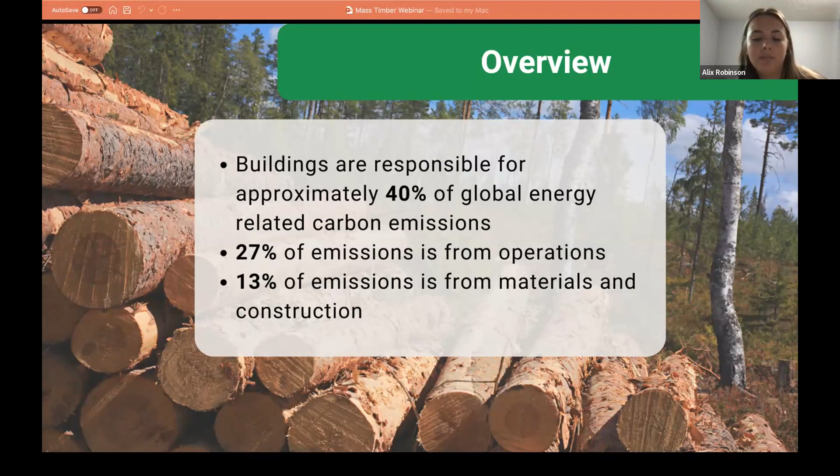To achieve Canada's climate targets, it's important to address the emissions from embodied carbon now. By doing so, we can pave the way for a lower emission building stock in the future. As a result, there is a demand for more sustainable construction materials, methods, design, and production systems. Mass timber is stimulating the construction market in Canada as it's being recognized as a sustainable alternative to traditional practices. This is why we're excited to bring this webinar to our network, to connect businesses and community members with valuable resources and experts.

I would now like to introduce our speaker, Steven Street, who will talk about the benefits of mass timber, some of the challenges in the industry, and provide insight on how you can initiate your own mass timber project. Steven is a longtime industry advocate who has spent more than 20 years developing domestic markets for wood products by creating new opportunities, driving change, and expanding the acceptance of wood structural systems in Canada.

Throughout his career, he has been around the best and brightest minds in engineering, architecture, and fabrication, an advantage that has allowed him to explore his passion for good design. Steven is active on ResCon's technical council and is assisting in fast-tracking the workforce and skills needed to build a low-carbon Ontario. I will now pass it over to you, Steven.

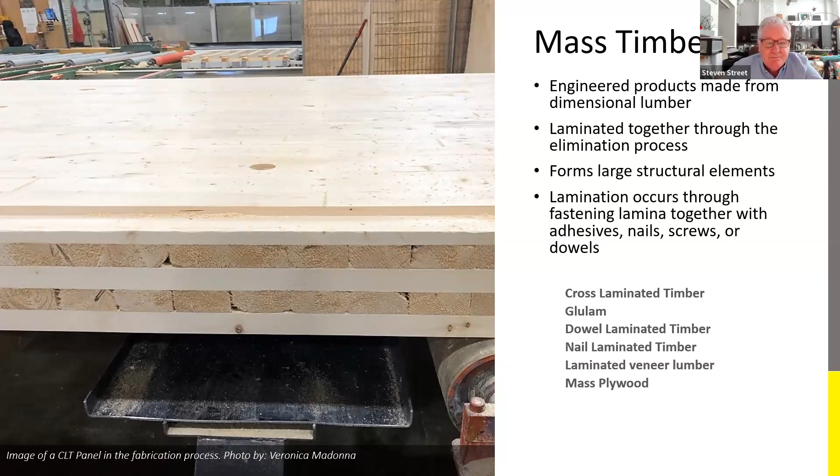This slide illustrates six product types: cross-laminated timber, glue laminated timber, nail laminated timber or warehouse deck, dowel laminated timber, mass plywood panels, and LVL or laminated veneer lumber panels.

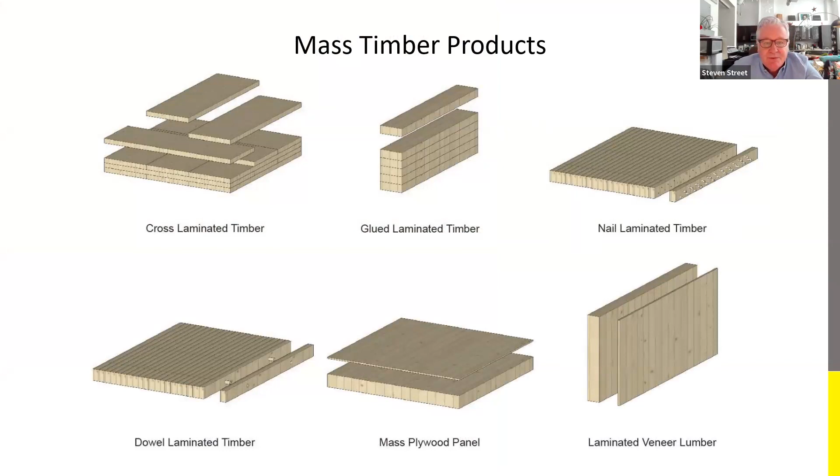Most of you are probably familiar with glue lam. Glue laminated timber is dimensional lumber stacked parallel to each other, creating long spans and high strength with this particular approach. The dimensional lumber is stacked, glued together, and typically columns, beams, and floor panels can be made from this.

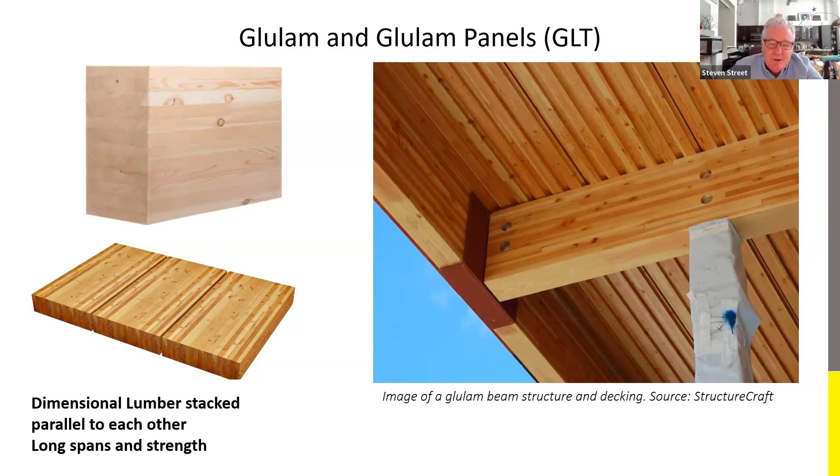Cross-laminated timber really came out of a collaboration between the academic world and industry in Europe probably 25 years ago or so, and we've steadily seen the European CLT market completely take off. They've been a bit ahead of us with their knowledge about the carbon impact of buildings and building types. Cross-laminated timber is really a very viable solution for shortening the carbon footprint of buildings.

This technology was introduced into North America around 2010, when the Austria House was fabricated at the Vancouver Olympics—the first project actually built in North America. Since then, we've seen a steady progression of buildings happen. It's the old chicken-and-egg thing, and now we start to have a large supply of materials spread across the country, so fabricators and interest in using this type of construction method is now building up.

Cross-laminated timber—this is dimensional lumber pressed together using adhesives, crossed over so each lamina is turned 90 degrees to the one below it, to find high strength, dimensionally stable products. This is probably as close to a reinforced concrete slab as you get, with the two-way action that the timber elements create.

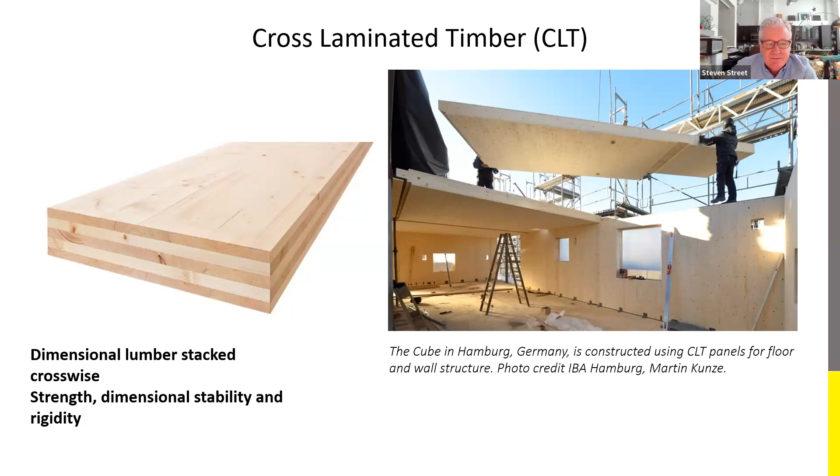Nailed laminated timber—we've used this for probably a couple hundred years. A lot of the post and beam buildings in the downtown cores of many of our urban centers across the country have actually used nailed laminated timber, or warehouse deck. This is dimensional lumber, basically 1.5 inches on center, nailed together using nails.

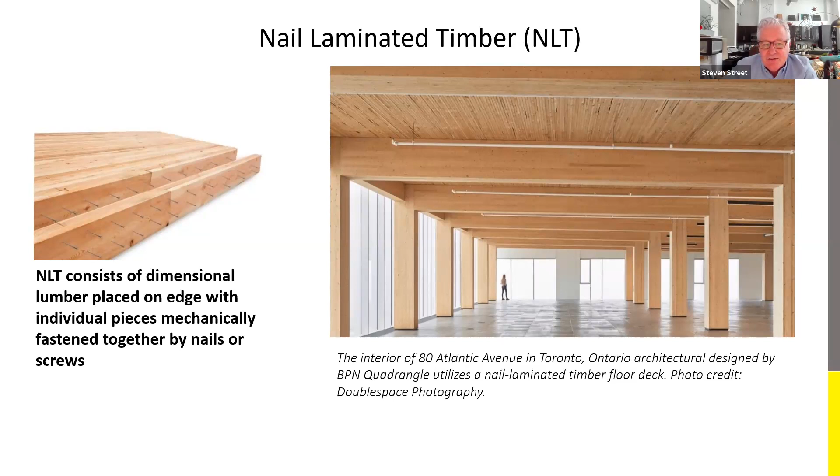There's an illustration here on the slide of 80 Atlantic in Toronto, in Liberty Village, that was actually fabricated a few years ago, just to give you an indication of how it can be used with glue lam columns and beams.

Dowel laminated timber is very much like nailed laminated timber, except the fastening is done with wooden hardwood dowels rather than nails. The lamina is set up 1.5 inches on center, and a hardwood dowel, which has a different moisture content than softwoods, is put through holes drilled in the members. The dry hardwood dowel will take on the moisture inside the softwoods and swell, so you end up with a very high strength friction fit.

So why are we talking today about mass timber elements? I think most of you know this slide, or a version of it. I like to call it the spectre of 2040, which is rapidly approaching us now. It's really about the decarbonization of our built environments.

Part of what our program does is watch what the industry is doing and how it's trying to evolve. So the focus very recently from many design companies that reach out to our program is very much on GHG emission reduction. It's part of the narrative when I've done presentations at the Ontario Association of Architects conferences—much of the questions we get are focused on GHG emission reduction.

So it's centered on the materials. Today we're going to focus on maybe some of the solutions that mass timber introduction into a build could give you. As you see, much of the focus on this slide is about the operational reduction and the embodied carbon side, or EC.

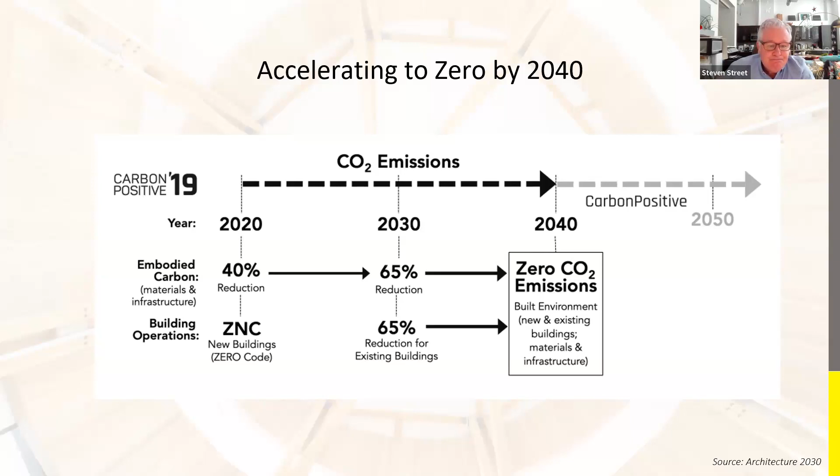I like to think that's a good chance to bring in architecture and make sure we're using architectural design and types of materials that really don't date. A lot of people ask me about the difference between European and North American architecture, and why Berlin, Vienna, London, Paris and so on have buildings that have been there for several hundred years—it's because the architecture is good and it doesn't date. If you've got something that's dateable in architecture, that threatens the building's lifespan as well. We need to be thinking not only about materials, but also how we design and what buildings look like in the future.

So, as I said, a building's life can be long, and operational carbon can decrease with building energy upgrades. In terms of operational carbon, that can shift around, and as we become better at using renewable energy sources and as grids electrify, that operational carbon value can decrease.

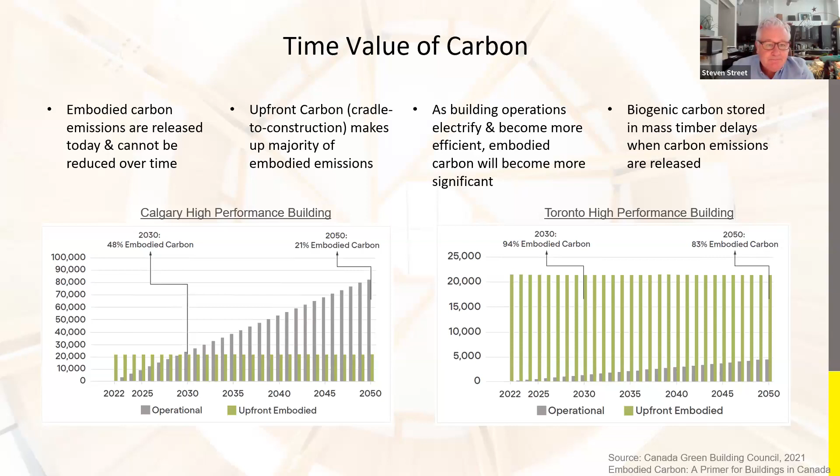So when you start to think about how you can bring sustainable procurement into your buildings themselves, one of the areas worth thinking about is where are you getting your products from? Where are the materials coming from? It's worth exploring this, and this is certainly where we can help with materials itself.

Maybe requesting a chain of custody certificate for the wood used in the products is viable. Various suppliers get wood sourced from different sources, so it's important to start thinking about forestry certification. Is there an accredited sustainable forestry program and standard in use where the harvesting is coming from?

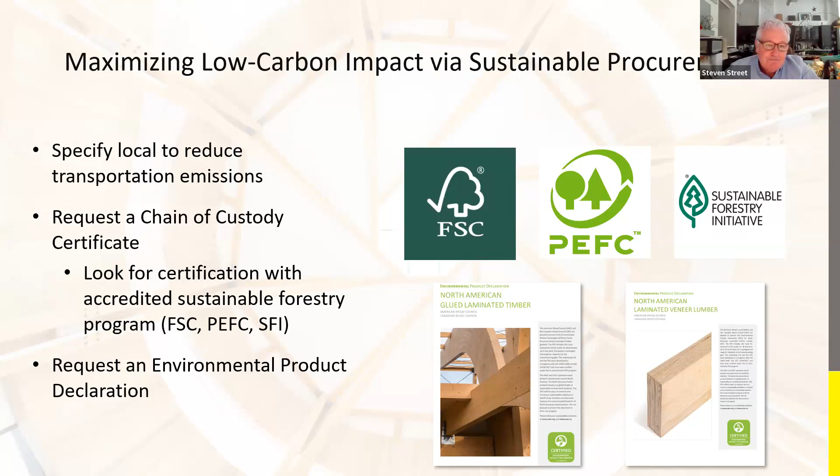Thinking about projects in the design stage, a good thing to consider is understanding the impact of the level of encapsulation and exposure on the structure itself. As architects tend to think about finishes, instead of having an encapsulated ceiling design, for example, you may be able to expose the timber structure, showing the beauty of the wood, but also creating the type of aesthetics that may be very pleasing to a client.

Residential tends to change a little bit from office buildings with aesthetics, and in a residential unit there is a need for drywall. You want to make sure you're not living in a log cabin, for example. But inside an office building, we've seen a lot of use of exposed structure, which lends itself to the aesthetics you're trying to create within the building.

So there are ways to do this. Sometimes, by increasing member size, you eliminate the need for encapsulation requirements that the building code asks for, and you not only get the desired aesthetics, but you also achieve the fire resistance ratings that you need to show in the building.

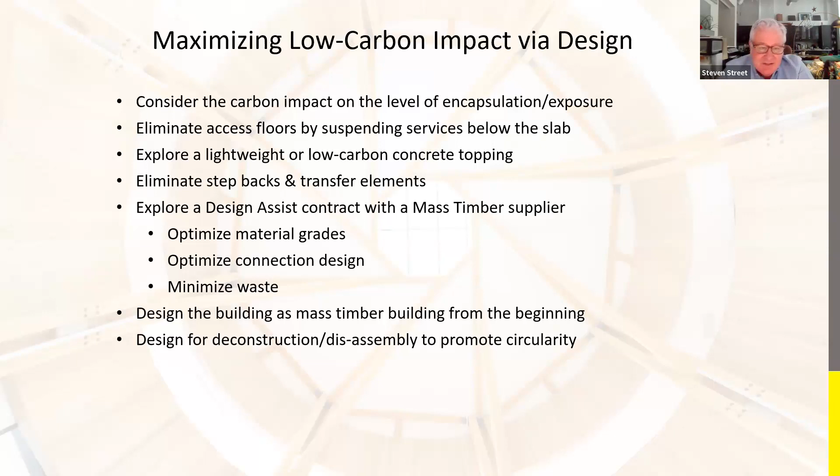So some considerations - taking what we've been talking about, it's very important to actually start thinking in terms of the project team. You're going to make sure that you have the right team involved, and I always say this is experience - have that sort of conversation with the design teams. Have you designed a wood building before? Are the engineering folks well versed in how wood behaves and what types of behavior you can expect with a wood structure? So having those conversations really early on is critically important. The engineer and the architect can work very closely with the timber supplier and the client to actually give them the building that they actually want.

I always love the word collaboration. It's the key part of success, for sure it is. Project procurement is really important.

Design and construction efficiencies are required. Really, you build that around the understanding of the supply chain and what's available. This is where a good team can bring in their knowledge from past projects.

And think about project location as well, getting back to that earlier point about supply and buying local, but you need to know where your materials are coming from. Building on top of that, how long is it going to take to get the product? Is it just-in-time delivery I'm after? What's the supply?

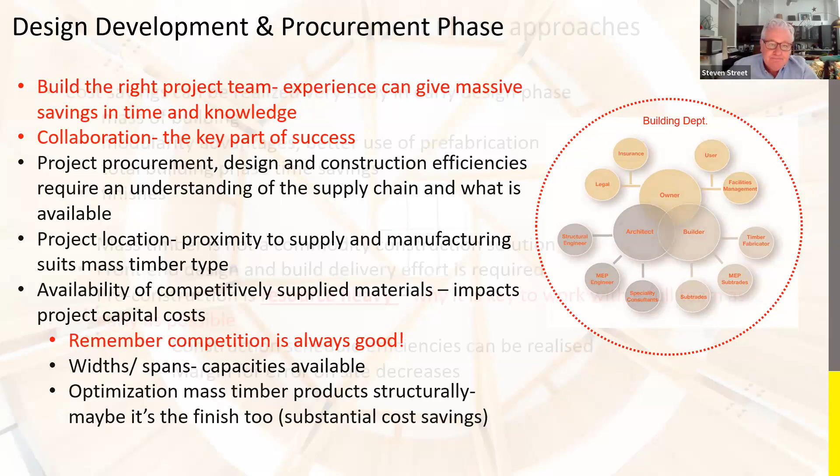So design development—if you can get the right team established, it's fundamentally important to have these conversations very early on. This is where you can really start to optimize the cost savings of the project itself.

So think about some key things: you're using material that may be up to 25% to 33% of the mass of the building compared to what you typically see with other building materials. That's going to have substantial savings in the foundation costs as well.

We're starting to see this as a real benefit as people explore renovation work as well. You've got existing concrete and steel structures, and maybe they're thinking about putting 2 or 3 stories of mass timber on top of those structures, and there's still capacity in the footings and foundations of the original buildings. So that's something to think about for adaptive reuse.

You've got advantages as well with the use of prefabrication, and that gives you real insight into the supply and scheduling phase of the project, which will give you significant savings as well. And I've covered finishes too—just be aware it isn't a commodity solution, so that front-end design and building delivery effort is very much required.

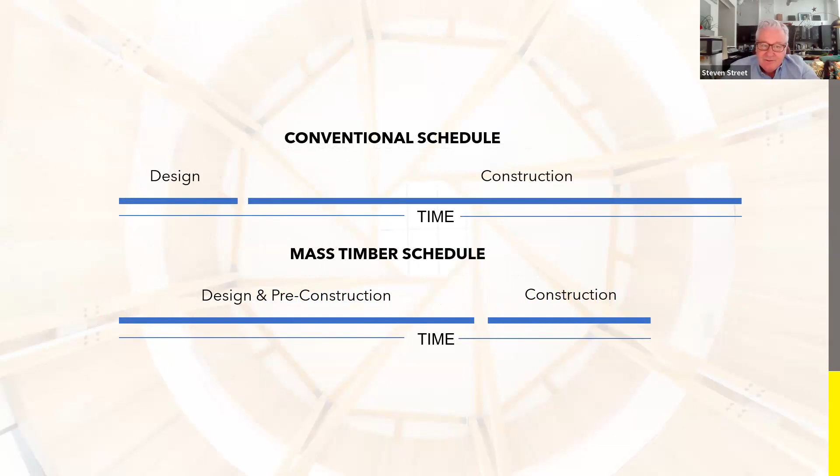Just to illustrate, in a conventional project schedule, design takes place and then construction is long and drawn out. Typically it shifts somewhat with mass timber solutions and scheduling. A lot of work is done on the front end with design and pre-construction phases, which incorporates the factory building as well, and then the construction phase is very much lessened.

To bring you up to speed on what we can do now, back in July last year the OBC changed, now allowing for encapsulated mass timber. A new provision was created inside the building code, in preparation of harmonizing our building code here in Ontario with the national building code next year, supposed to happen around March or April. We're in this two-year window when the codes now start to align.

The national building code allows for 12-story encapsulated mass timber provisions, and then in July it came into play.

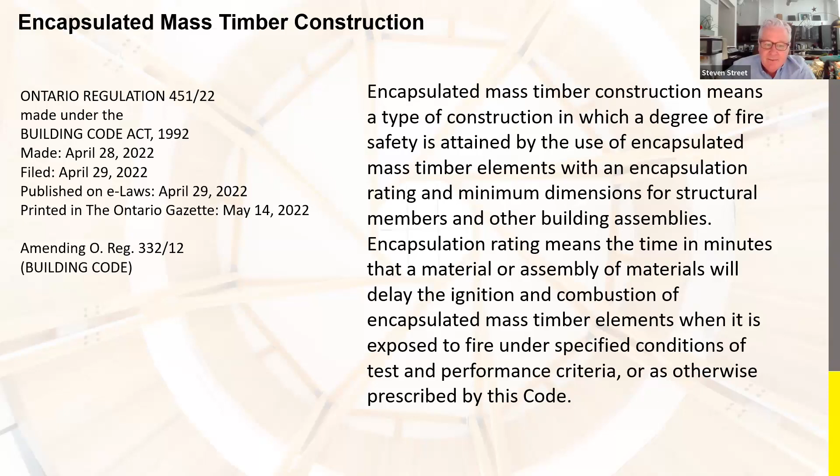So what is that? It's 12 stories of height, sprinklered to NFPA 13 throughout, 2-hour required fire resistance rating, giving an area of 6,000 square meters for Group C residential, and Group D office and business, 7,200 square meters.

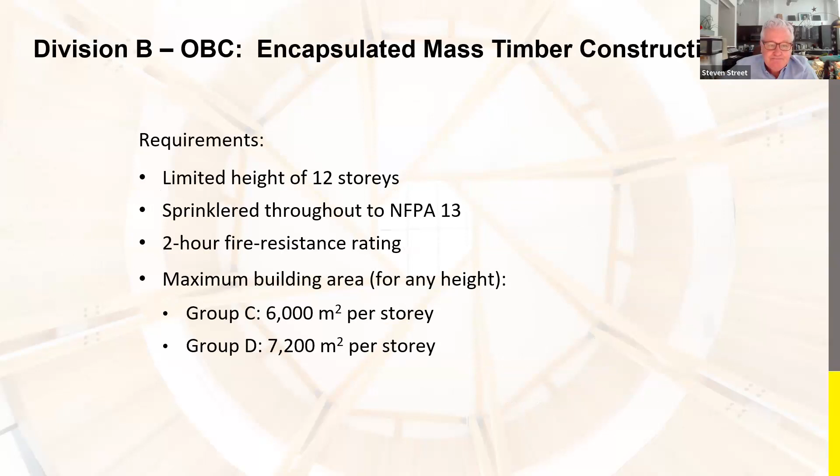Basically, you're permitted to do C and D throughout the 12 stories. And with the residential clauses, you're allowed to have a mixed-use building with Group E on the first and second story, Group A on the first, second, and third stories, and storage garages below the 5th story.

There's an increased fire resistance rating separation between some of the major occupancies, depending on what you're bringing into the building. And for Group D, that's 12 stories in height.

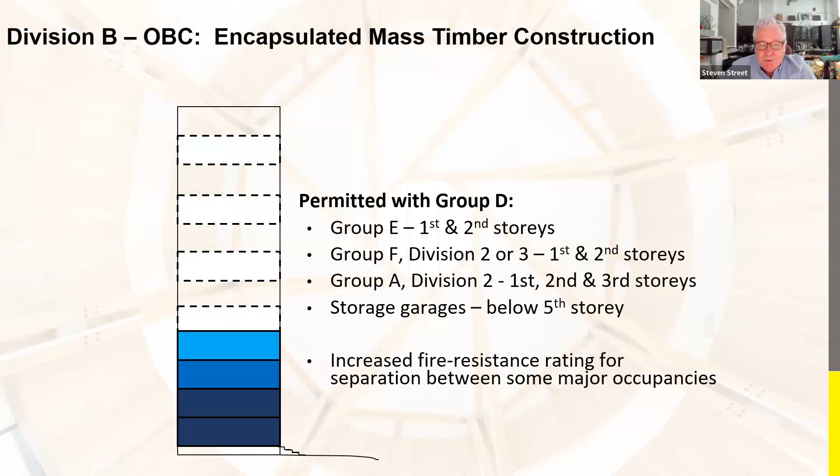Group E can be first and second story, Group F division 2 or 3 first and second stories, and then Group A first, second, and third story. Again storage below the 5th story, with increased fire resistance rating depending on the occupancy you're mixing it with.

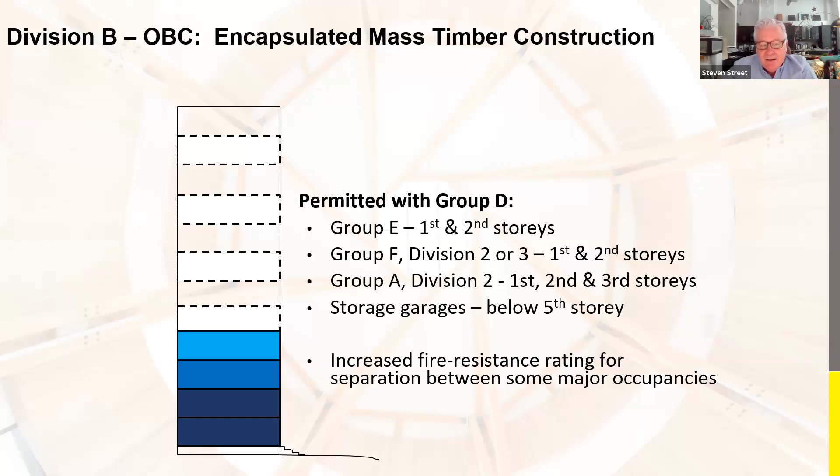So the idea is that you can now start to expand up to 12 stories, which is typically what encapsulated mass timber provisions allow. So what does that actually mean?

We followed a key path similar to when the building code changed back in 2015, allowing for 6-story light wood frame and mass timber use in buildings in Ontario. We took the same team we work with at Morrison Hershfield and said it's one thing to see the code evolving to allow these types of buildings, but how will the design industry - architects, engineers, developers, builders, construction managers, and authorities having jurisdiction - actually see these types of buildings in their marketplace?

If you don't get to scan the barcode here, that's fine - just drop me a note afterwards and I'll send you the comprehensive guide. It's about 100 pages long, but it's really about how you utilize those new code provisions and maximize the opportunities they bring through the code.

Is a lot of this new stuff? Not really. I think we lost our way around our wood use over probably many decades.

Just an illustration here - back in 1905, this is actually an 8-story building in Gastown in Vancouver, which is still there, still functioning very well. It's amazing, through our work touring buildings like this, that you can see real efficiency in how structural engineers and architects work together to create the kinds of spaces that much of this code progression is taking us toward - and we've seen them working for 100+ years now.

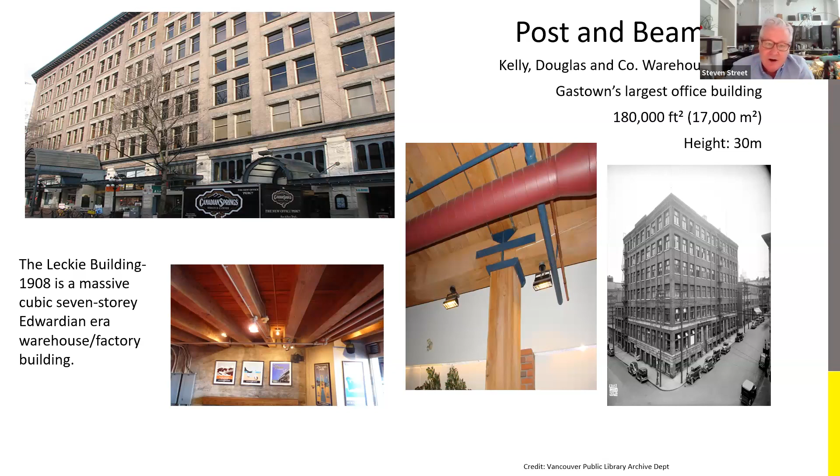Unfortunately, the land that they sit on is even more valuable, so we're seeing a lot of these buildings disappearing with 30, 40-story buildings put in their place. It's not that the buildings aren't working anymore, it's just that the land they sit on is being optimized with high rise going on top of it.

Just a couple of projects I thought might be worth showing - here's the Limberlost at George Brown College, which I was actually at yesterday for the topping off ceremony.

This is a 10-story building, first of its kind actually, because it's an academic institution at the college, and it's an assembly occupancy that is the full building. That's never been done before. This was actually taking the performance of mass timber, and I think there were 5 alternative solutions done to create this absolutely wonderful building.

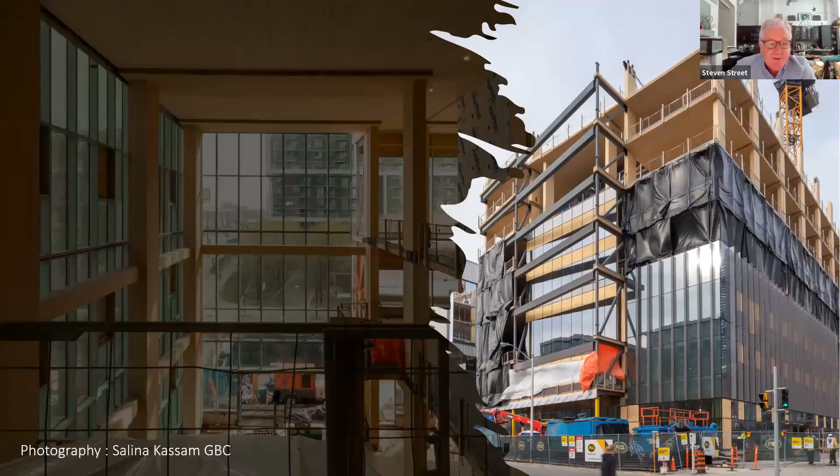If you are down in the Queens Quay area in Toronto, you should go take a peek at it. You can see on the right there, this is from the street. It's up to, I think, the 8th or 9th floor when we took this photograph. Salina's image there shows the 3-story glulam column, which I believe is the largest glulam column in North America to date. It's an incredible, very sustainably driven project that Moriyama and Teshima did.

On the right side there, you can see that steel triangular canopy that sticks out from the side of the building, and that's actually going to be a solar chimney. If you'd like more information on that, please reach out.

Just some illustrations as well that it's not just these large academic places that use mass timber. This is an industrial building under construction currently in Sudbury. I'm sure they've got the cladding on right now, but the client said, I build industrial buildings, I want to do something that's better for the environment. So they went down the path of mass timber as well. Very simplistic, using glulam post and beam, and then a CLT structure on top for the various decks inside the building and the roof slab.

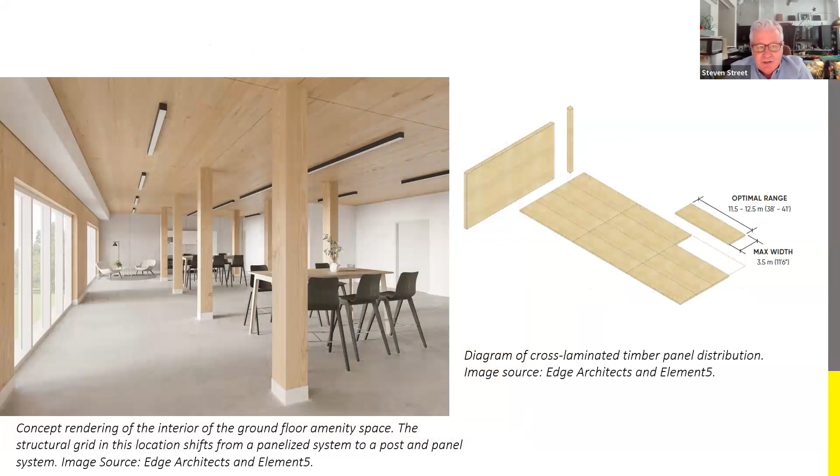Close to home, if you're in the Kitchener-Waterloo area, this was a very interesting supportive housing project. Edge Architects developed it, and Element 5, who are in St. Thomas, supplied the panels for it. It was supportive housing. There's actually a second building now built next door to it on Block Line. Really very simplistic, again utilizing glulam elements with CLT slab.

It really did illustrate the complete coordination between that design assist, making sure everyone understands the potential schedule savings when the installation started.

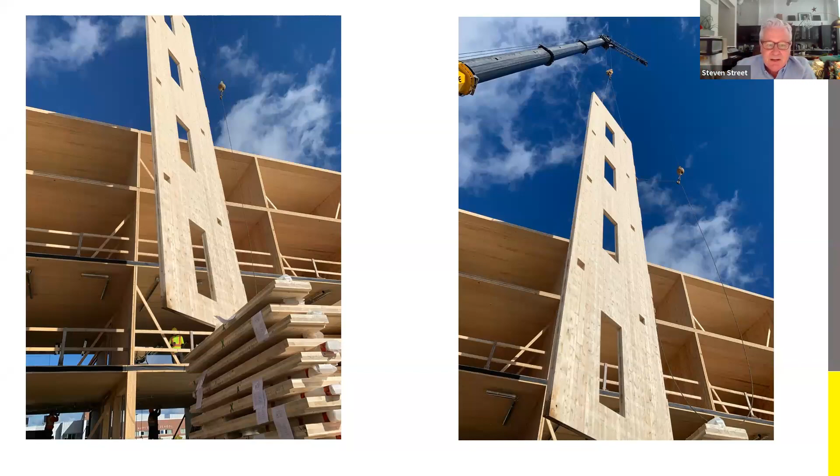The facade panels in this case were mass timber elements. They were vertical, and then they were keyed into place. So once the structure itself was built, they just came along in a very long line and put the panels in, and the building was closed in, I think, in about 3.5 weeks. The main structure was there, and there's actually a really good video of this particular project going together. So it gives you an idea that this is actually happening in the marketplace.

If you'd like more information on it, certainly please reach out to me. Thank you very much for your time.